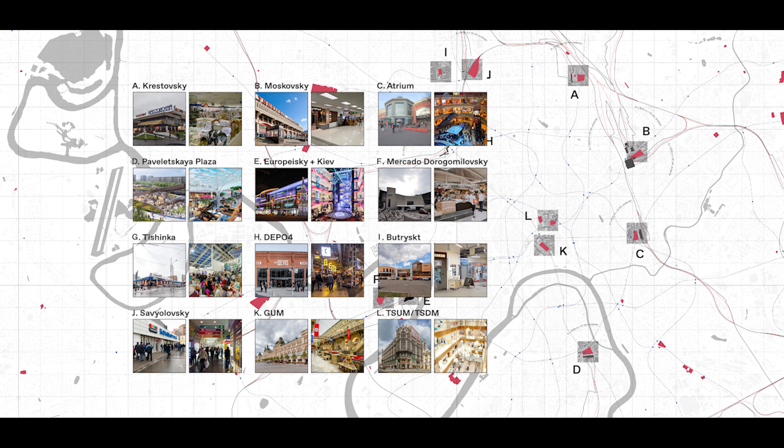It is said that the Russian capital was built on top of 7 hills. If this is an unfounded legend, to be compared with Rome, it will stay in the collective imaginary. What is in fact true are the 608 hectares of waste hills surrounding Moscow's periphery, urban landfills that fill the landscape with piles of used materials.

Moscow produces more than 50 million cubic meters of urban waste a year, and only 4% is recycled. More than 90% of waste in Russia is not processed and ends up in the landfills. These new hills on Moscow's landscape are in part a result of our massive consumption behavior that ignores the afterlife of products.

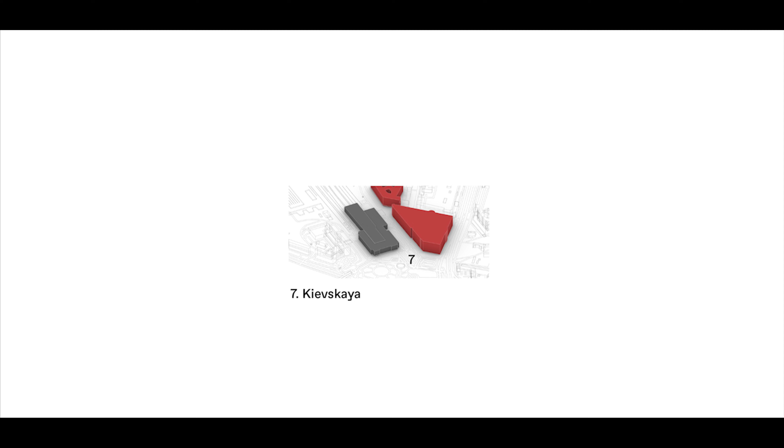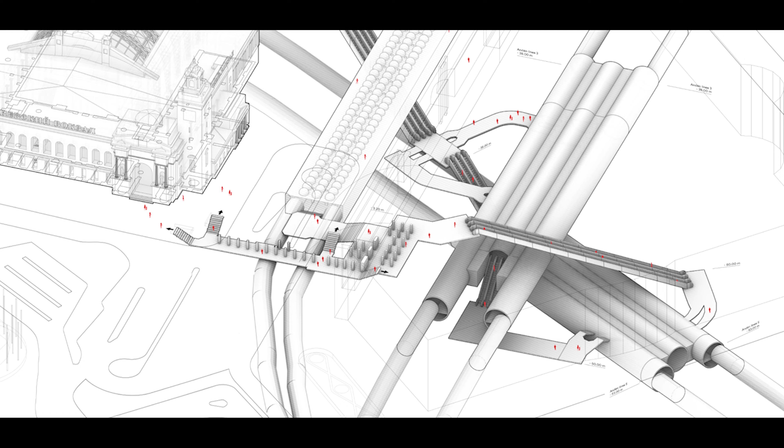When we get closer to the city, we realize that there are urban spaces where these behaviors are not only happening, but are also being promoted, camouflaging as entertainment, retail spaces, and shopping malls. For these spaces to succeed, they need accessibility within the city, so they are strategically situated in the nodes of the transportation net. They are found next to the main stations or hubs of the city, taking advantage of the fact that commuters need to change their means of transport to draw their attention.

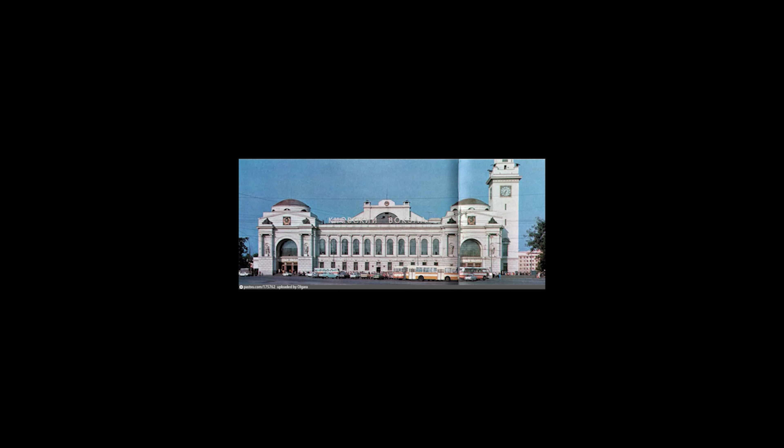On some occasions, these two buildings are so close together that they form a unified single urban entity that strongly promotes consumption as a way of entertainment. We get closer to one of these hybrids to analyze it closely, the Kievskaya station. The north facade of the station faces directly to the Europeisky shopping mall, forming an elongated plaza open to the city on one side.

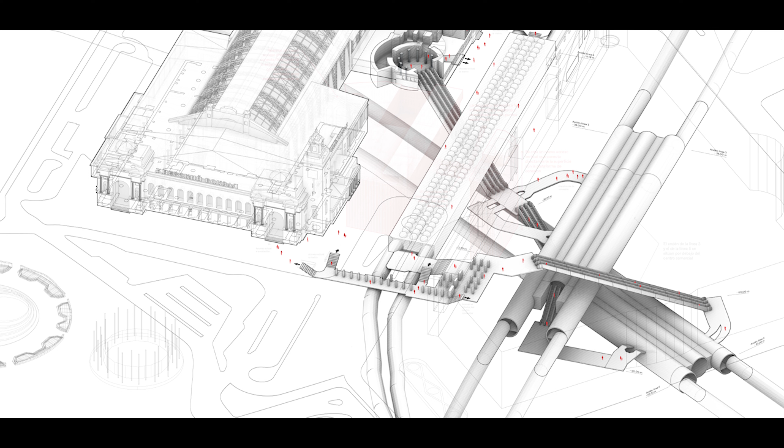Under it, there are 3 underground metro platforms with different depths, all joined with a complex tunnel system with multiple entrances. This tunnel layout determines the daily performance of the commuters moving within it.

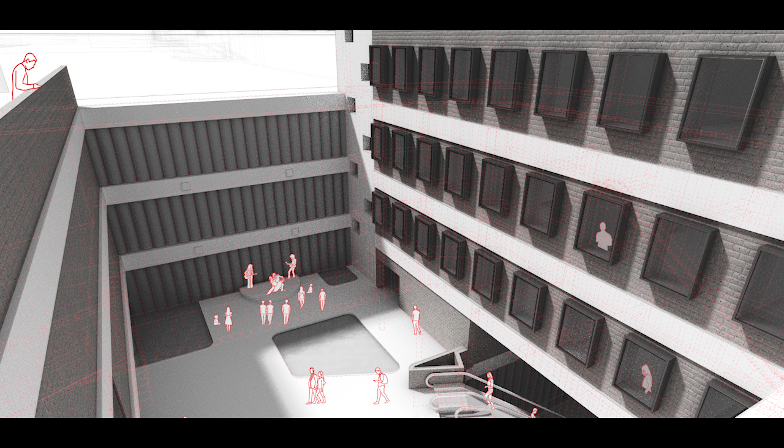Due to the impossibility of traveling there, the surrounding was digitally studied through a collection of images that display the materiality of every surface. Stations like this are also representative spaces of the city, and especially in Moscow during Soviet times, they were used as tools to create a feeling of collective national pride. Known as palaces for the people, the stations were built with rich decorative materials such as granite, terrazzo, and marble.

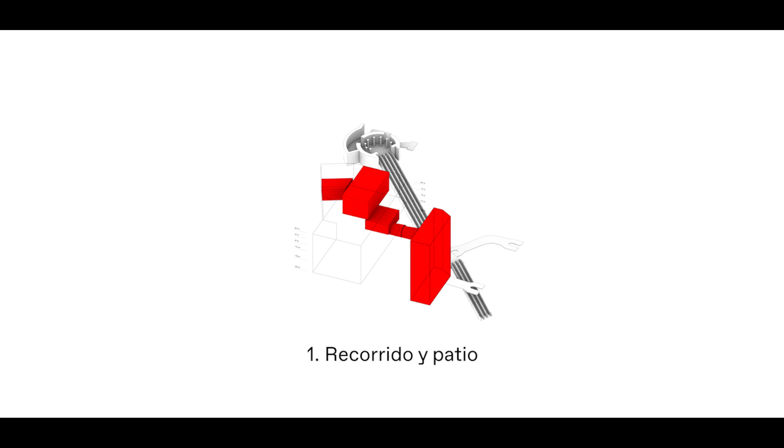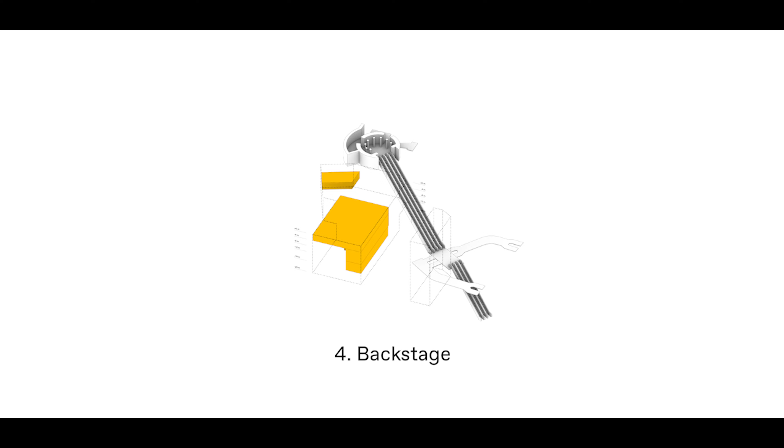After this analysis, and inspired by the existing surroundings, I propose to extend the transportation hub, creating a new axis that provides an opportunity for a type of entertainment that doesn't promote consumption. The performance of the daily transit is incorporated as a theatrical program into the building. This new entrance will be built with recycled materials as a way of directly criticizing the shopping mall and the consumerism it represents.

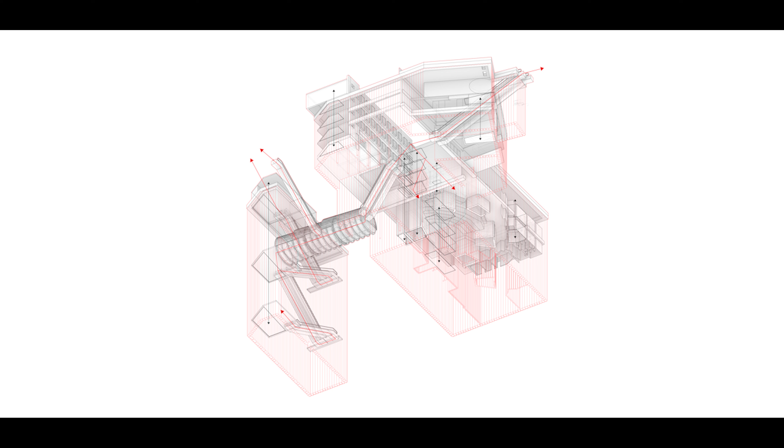I decide to dig the project into the earth as a gesture of approximation to the existing infrastructure. This action is seen as a negative of a landfill, a subtraction instead of addition. But this is not only a hole in the ground, it is also a patio that organizes all the program and allows a higher degree of visual relations. In addition to the hub's expansion with this new path, a theater auditorium, a theater school, and a residence for artists and students are introduced as a new program.

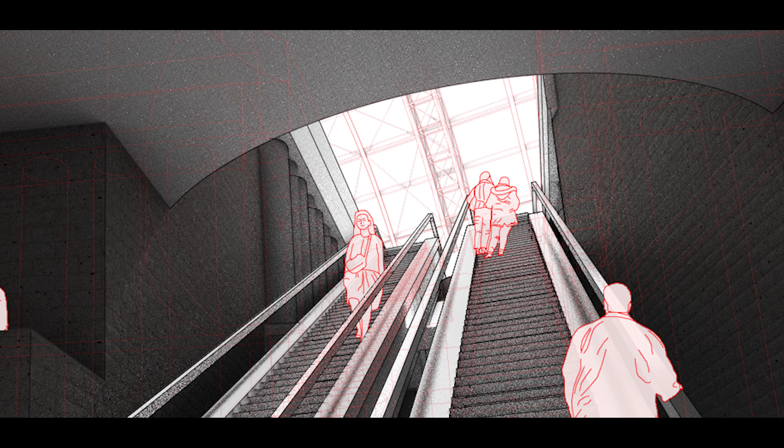These new uses are connected through a backstage that makes possible the circulation of the actors behind the walls. Despite the central role of the patio, the project crosses linearly the whole space with a new connection that joins the over and the underground station.

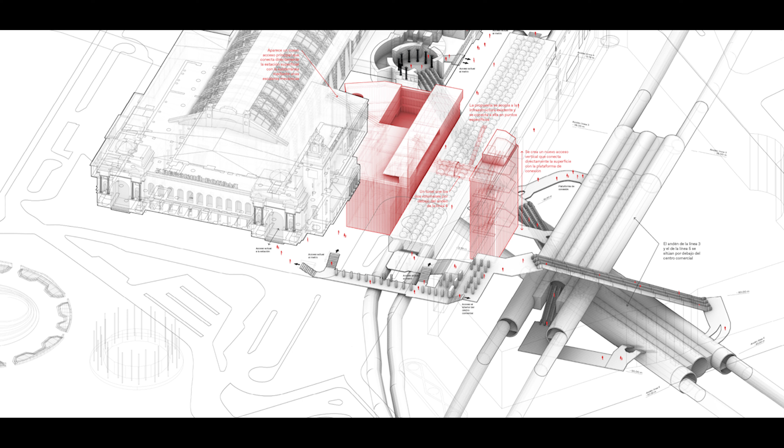This new connection or axis generates a path where a series of opportunity spaces appear, opportunity spaces for performance. There where you usually find ads promoting consumption, you will find actors, musicians and other artists that will draw your attention. I intend to break the barrier of traditional theater where the roles of actors and viewers are strictly limited.

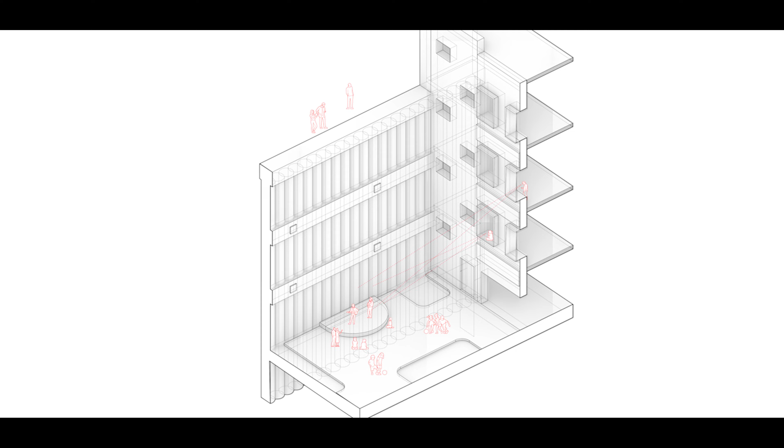Here, the commuters are part of an hourly performance of comings and goings, while the actors can mix with them or observe them from behind the walls. This way, I create a new cultural space intersected with the station, where I replace consumerism with performance and theater culture. For the execution of the project, I propose to follow a constructive strategy adapted to the ground preconditions and the proximity of the nearby buildings.

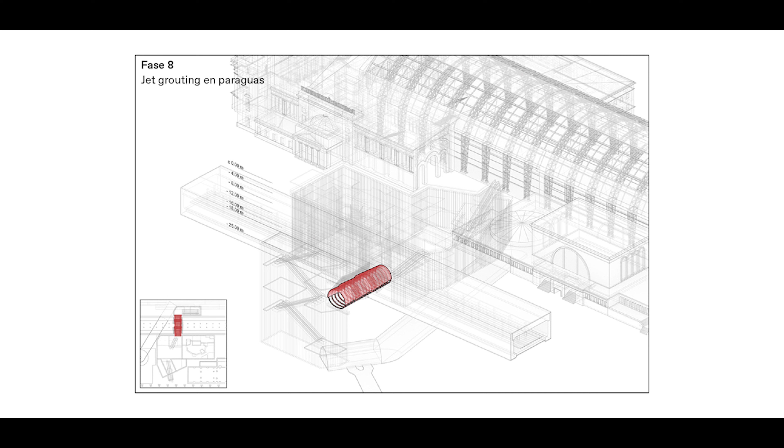The Milan method is chosen as the building method. This consists of building firstly the vertical structure with foundation piling, and then executing slowly the slabs from top to bottom. This methodology, although being slower and more complex than traditional processes, significantly reduces the ground movements and possible damage on nearby constructions.

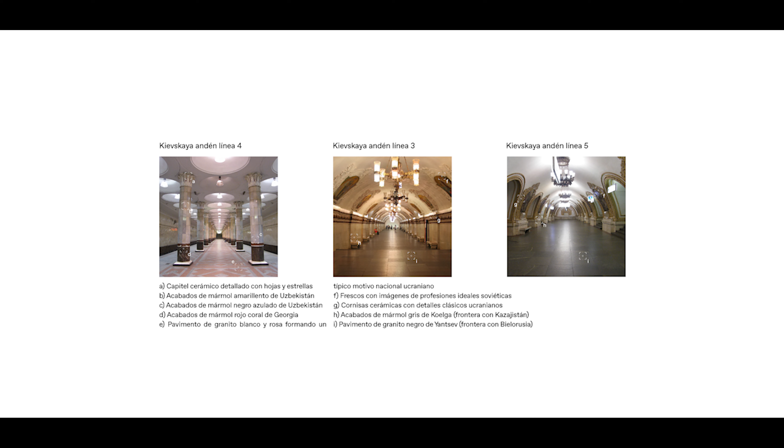In parts of the building, one can perceive the cylindric texture of the construction piles with a raw, shotcrete finish. The small water leaks that could happen are incorporated into the design and are funneled inside the patio. The last slab at the bottom is executed as a subpression slab.

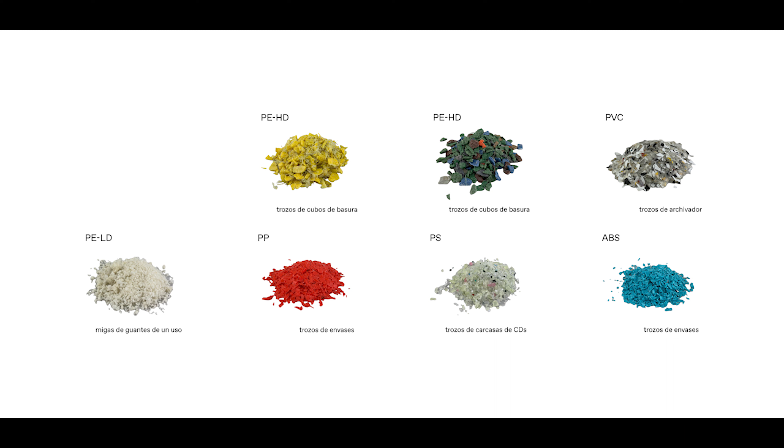From here, a new tunnel is built to connect both sides of the building under the existing metro platform. This will be executed after previously freezing the ground with a micropile umbrella and some jet grouting injections following the form of a fan for the lateral ground retention.

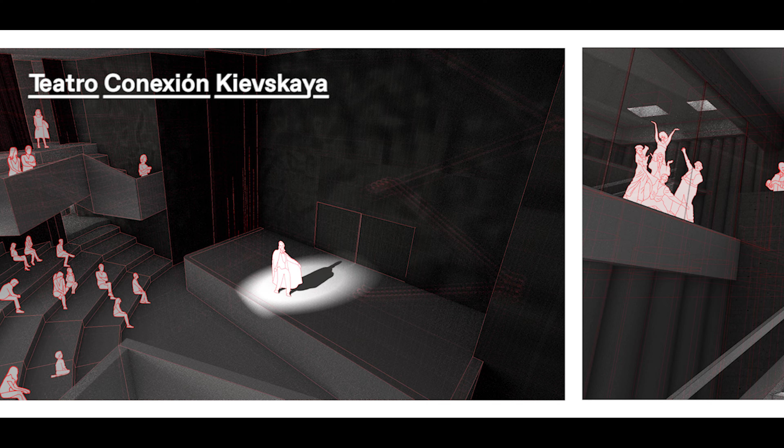In order to express the clear opposition towards the amount of waste we generate, I propose to incorporate recycled materials in the construction and finishes. These finishes are referencing the materiality found in the Moscow metro stations and adapting them to a post-carbon reality where we can and we must use recycled materials.

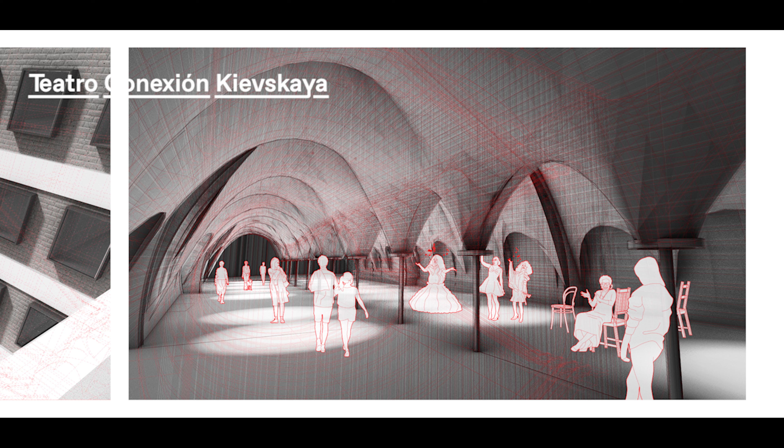I decide to work with recycled plastics because they represent the biggest portion of non-biodegradable waste found in landfills. I experiment with them to find building solutions. I end up using it as plastic agglomerate to non-structural concrete and as recycled plastic blocks 23 x 40 x 22 centimeters used in walls and facade.

Teatro Conexión Kievskaya is a unique cultural space for interactive art where one can see and be seen, observe and be observed. It is a clear criticism against consumerism as a way of entertainment, and it's a reference to the palaces for the people, interpreted in the post-carbon era. Thank you very much.